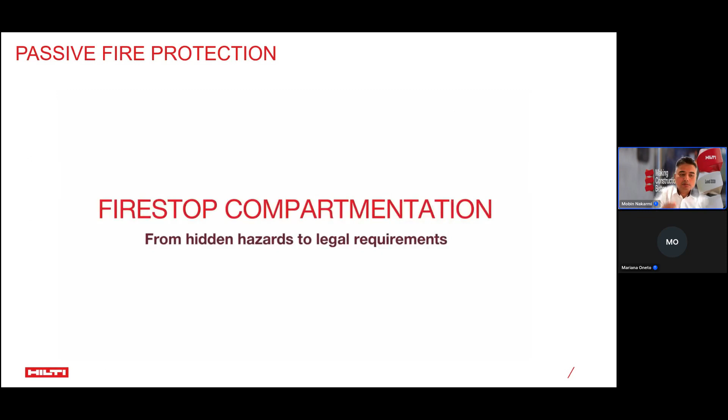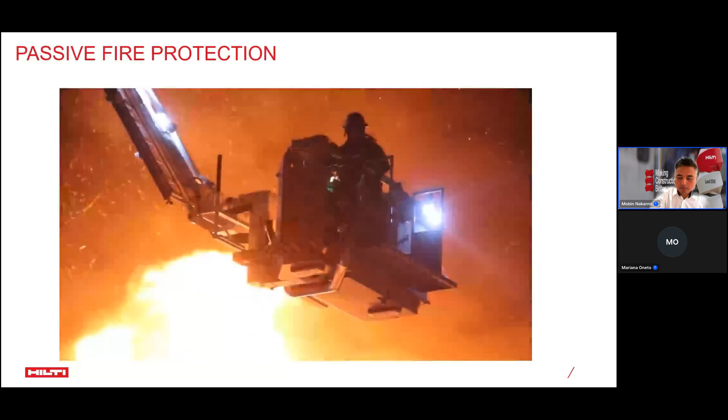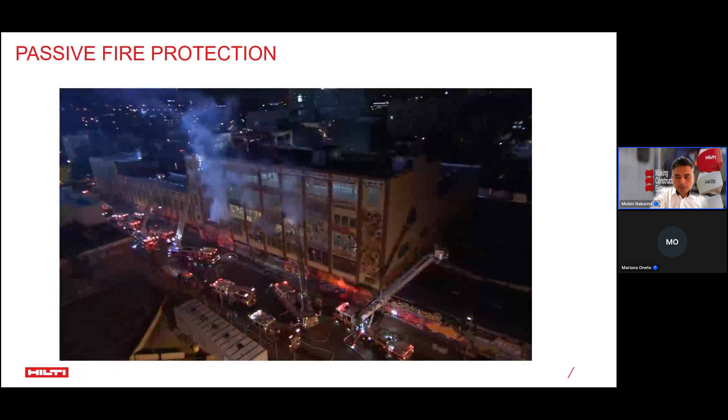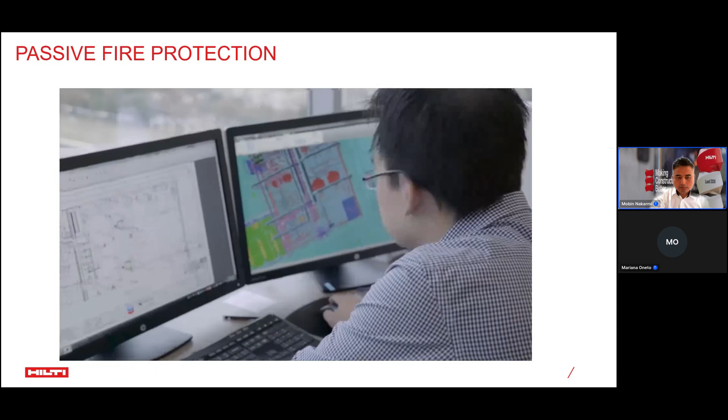Typically, 5 minutes is all you get. Fire, and especially smoke, spread through a building much faster than most people think. Every year, about 3.8 million fires occur worldwide. While damage to assets is in the billions, the yearly death toll amounts to 45,000 persons. Much of this could have been prevented if correctly installed fire protection had been in place. Architects, planners, engineers, and building owners are responsible for effective fire protection. Oftentimes, they do not realize that Firestop is not an option. It's a clear legal requirement, and negligence or improper execution is a violation of the law.

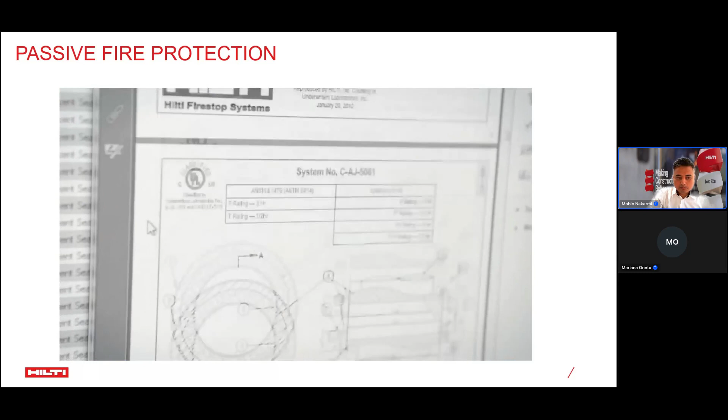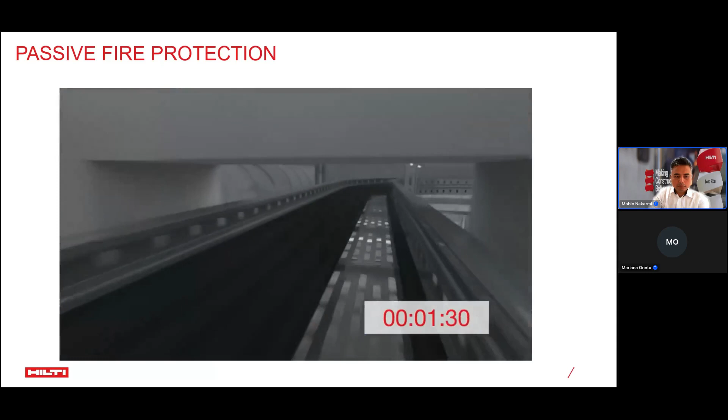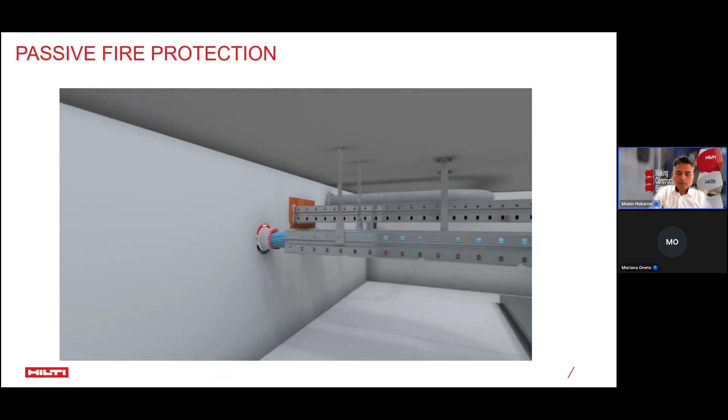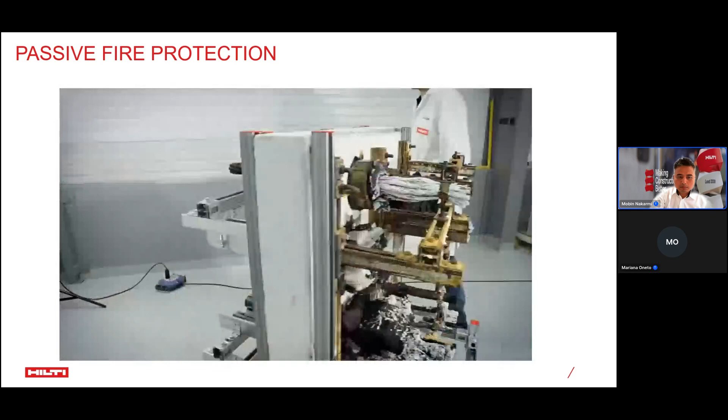Nearly 60% of fire deaths are not in the room of the fire's origin, and 3/4 of all fire deaths are caused by smoke. When there are through penetrations in walls and floors, toxic smoke easily spreads to adjacent rooms. The keys to effective fire protection are both active protection, such as detectors and sprinklers, but also passive protection. Passive means that penetrations in walls and floors have been sealed with approved Firestop products. This principle is called compartmentation. When installed correctly, fire and smoke won't be able to spread from one compartment to another. This allows for safe evacuation of people and protects valuable assets.

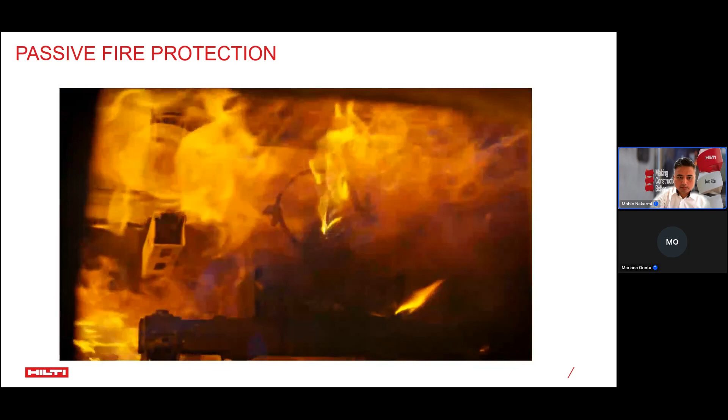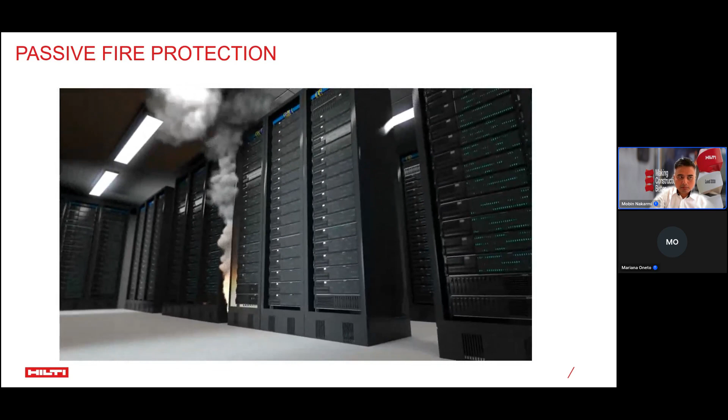The thing about compartmentation and fire protection is it's only as good as the products you use. One always thinks that accidents only happen to other people. That's a false conclusion. It is the responsibility of architects, planners, engineers, and building owners to protect lives and assets by effective and well-designed compartmentation.

Well, that was a very nice video. It also illustrates how fast the smoke and fire travel, if you've noted the time that was shown in the video. It also talked about the concept of compartmentation and showed different kinds of fire protection measures that are in buildings.

So in a building, there will be different kinds of fire protection measures in place. For example, your detection system. Some of the examples are your fire alarms, your smoke detection, your gas detection systems. So if the fire, smoke or harmful gas propagates, the occupants need to be alerted, and that is the way to do that in the building.

The next one is your active fire protection. Examples of that will be sprinklers and your fire extinguishers. The concept here is to suppress the fire or smoke by cutting off the source of the fire itself or oxygen. The next one, which is the topic of our interest for today, is your passive fire protection.

It relies on the concept of compartmentation as discussed in the video, limiting the spread of the fire from the place of origin to other parts of the building. Some of the examples are your fire doors and passive fire protection products applied in penetrations and joints. We'll be talking about why third-party certification for such products is important today. But I should also mention that effective fire protection is a balanced approach between both passive and active measures.

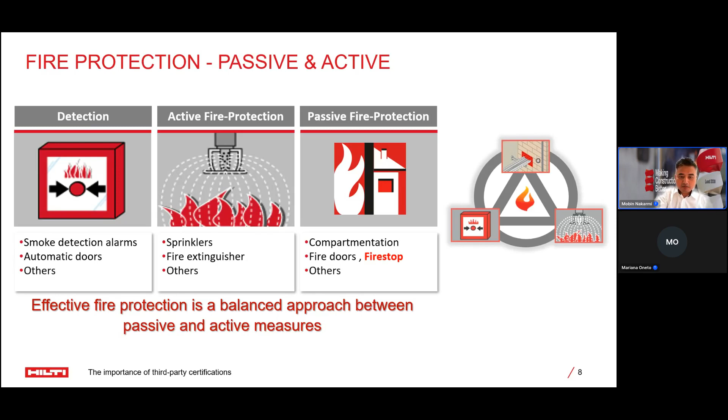Now, going back to fire compartmentation, also known as fire zones, as discussed, it is a globally renowned concept, first of all, and it's well defined in NCC. The concept is to limit the spread of the fire, smoke or harmful gases from the place of origin to other parts of the building, so that occupants can be rescued.

The fire exits and your corridors are safe for a period of time, so the occupants can be rescued. Emergency services can reach out in time and carry out the rescue operation, and it also maintains the structural adequacy of the building, so that the rescue operation can be carried out.

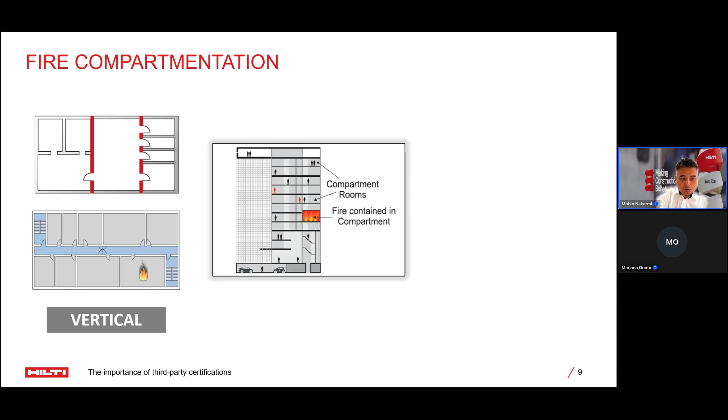Okay, so there are two types of compartmentation. One is called vertical compartmentation, created by fire-rated walls. As you can see in the picture, the fire-rated walls are protecting fire from spreading to the corridors. The other one is your horizontal compartmentation. The concept here is to build fire-rated floors so that the fire and smoke don't jump to a different level.

So in a building, normally both vertical and horizontal compartmentation will be in place to divide the building into different compartmentation zones. And NCC provides a great explanation on how these buildings, depending upon the occupancy, the class and the type of the building, should be divided into different fire zones.

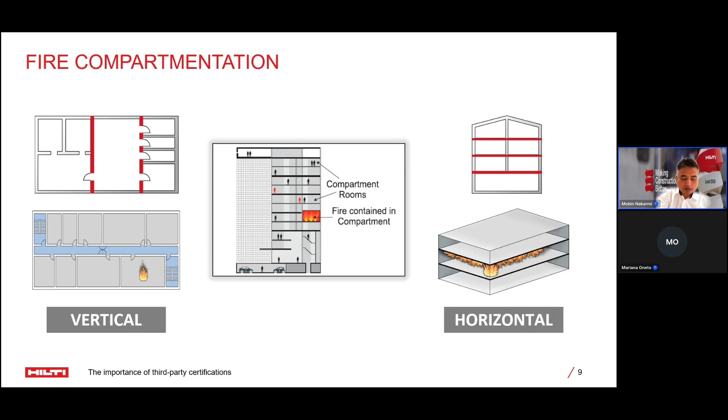Now, we mentioned the concept of compartmentation and the fire-rated building elements, the floors and walls, to create those compartmentations. But we also need to acknowledge that different services need to penetrate through these walls and floors in the building, like your cable trays, power and communication cables, your HVAC pipes, your plumbing pipes. And there will also be joints and joint gaps to allow natural movement of the building.

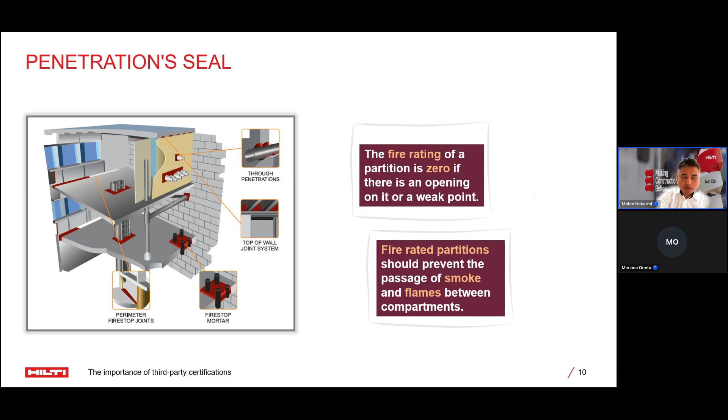But having said that, these gaps and penetrations are the natural pathway for fire and smoke, and that's where it spreads from. What it means is as soon as there is a penetration or a gap, the fire rating of that building element or compartmentation immediately becomes 0. These penetrations and gaps need to be fire treated to retain the minimum FRL rating of that building element. Passive fire stopping can be divided into 3 categories.

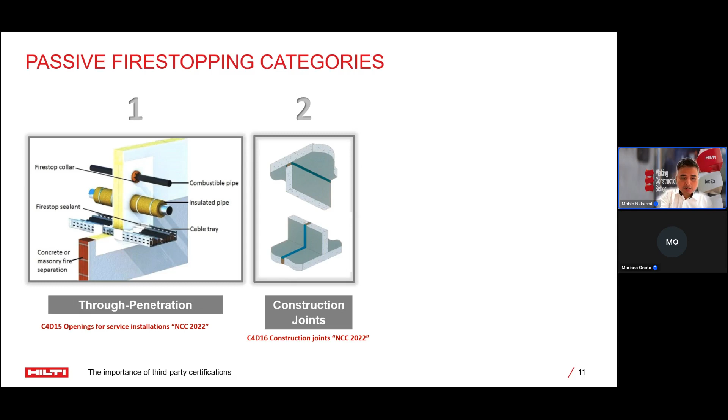The second category is your construction joints. Examples can be your top of wall joints, wall to wall joints, floor to floor joints, your expansion joints. Any kind of static or dynamic joint is included in this category. The deemed-to-satisfy provision for that one is Part C4D16 in NCC 2022. The last one we have got is your perimeter joints.

So it's normally your fire-rated floor touching the non-fire-rated, the joint between the fire-rated floor and non-fire-rated curtain wall or facade system. And you can notice that there is no deemed-to-satisfy provision written over there because there is none. So basically, because there is no deemed-to-satisfy provision, it doesn't mean that we do not have to treat it. All right. So normally the performance requirement of such is met by a performance-based solution.

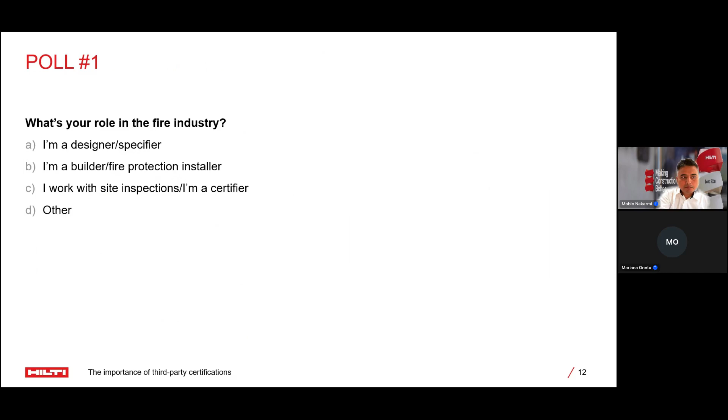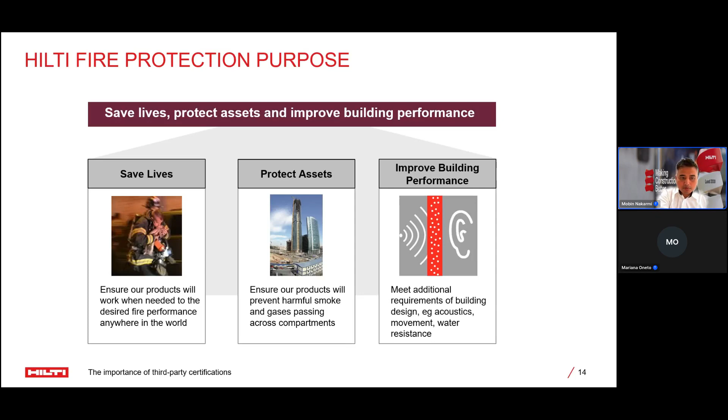Now, this is our Hilti Research and Development Center in Kaufering, Germany. I believe, Mariana can correct me on this one, this is the second largest site for Hilti after our headquarters in Schaan. So in that development center, there are different business areas for electric tools, accessories, and fastening. Also, fire protection is one of them, right? We do have the competence center over there as well, for different business areas like electrical tool approvals, prototyping, analytics, etc. And it is also the Center for Research and Chemistry Technology. And fire testing is one of them. So we conduct fire testing in our R&D center.

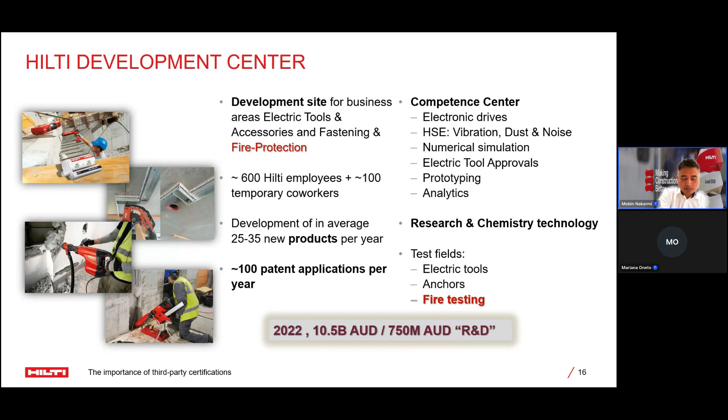One of the interesting facts I want to highlight is that annually, on average 25 to 35 new products are developed in the R&D center, and that's pretty significant. So we invest around 5% of our turnover annually in R&D to develop new processes, new technologies, and new products. So in 2022 alone, 750 million Australian dollars was invested, where the turnover was 10.5 billion. So that is a testament to our strong R&D.

One of those examples in terms of Firestop innovation is preformed devices. Now, foams and sprays and sealants, they are all approved products, and they're well and good as well. But the thing is, you need a little bit of skill to apply those kinds of Firestop. It needs to be applied to a certain depth. A certain annular gap needs to be maintained. The services need to be supported at a certain distance, and it needs to be cured as well. So preformed devices eliminate those kinds of challenges. First of all, they are easy and fast to install and avoid human mistakes, or I should say minimize human mistakes.

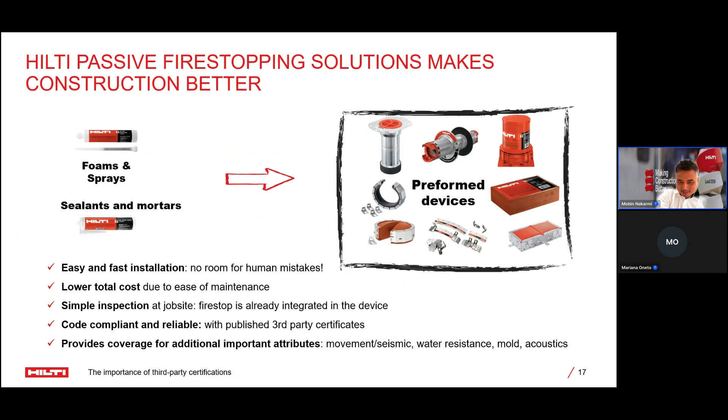The cost of maintenance and even the cost of installation is reduced if you look at the overall cost, because it's very productive and it's easy to install. And it's easy to inspect in comparison to sealants as well. The Firestop is already integrated in the device, and as you can see from the picture itself, it is easy for inspection. And all of our Firestop products, not only the preformed devices, are code compliant and reliable. And they have third-party certificates as well. And they also provide coverage for additional important attributes, as mentioned before, for movement, water resistance, air tightness, mold and mildew, acoustics, etc.

Okay. Now we'll jump into our main topic for today, which is third-party certification. All right. So what is third-party certification, right? Third-party certification means that an independent organization has reviewed the manufacturing process of a product and has independently determined that the final product complies with specific standards for safety, quality, or performance. So therefore, an accreditation body must first provide an accreditation for the third-party certifiers to allow them to certify products for a certain field of application, such as fire safety. And in Australia, JAS-ANZ, which stands for Joint Accreditation System of Australia and New Zealand, is the authorized accreditation body who shall approve both the certification schemes and the certifiers.

The review of the third-party body includes inspections and auditing for both the production process and the product itself. It includes formulation and raw material reviews, fire testing, facility inspections, sampling, etc.

So once the product is certified, it will usually bear the certifier's mark on its packaging, so it is easy for recognition by the end users. And the third-party approval will be published publicly on the third-party organization's website.

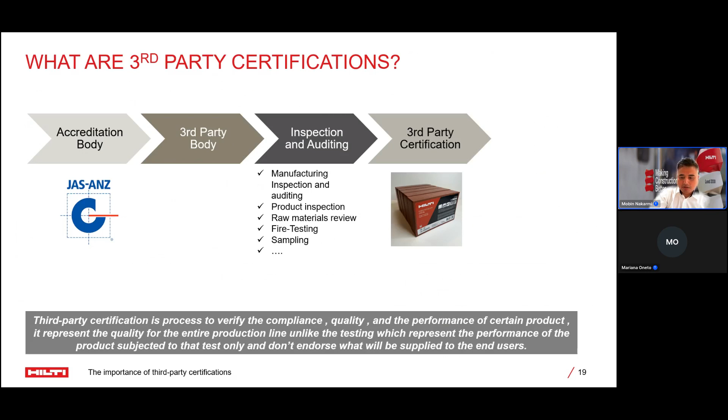Finally, I shall highlight that these processes are continuous, so it's not a one-time process, all right? That means maintaining the third-party certificates also requires maintaining a high quality of mass production of the product for its entire supply life, right? So if we are supplying it in the market, then we need to maintain that quality of the product as well, okay?

Now we understood a little bit what the third-party certification is. We'll look into third-party certifications and why it is important. But before we do that, we have another poll question that must have appeared on your screen. The question says, quality issues in which items below can lead to non-compliance of passive fire protection? Is it A, product, B, installation, C, raw material, D, production, or E, all of above?

Well, thank you for answering. Right, so it should be all of above, isn't it? If there is a quality issue with any of those, product, installation, raw material, production, that can lead to non-compliance of passive fire protection.

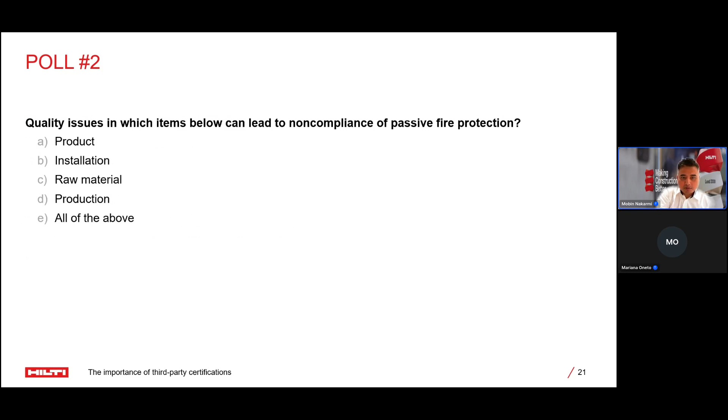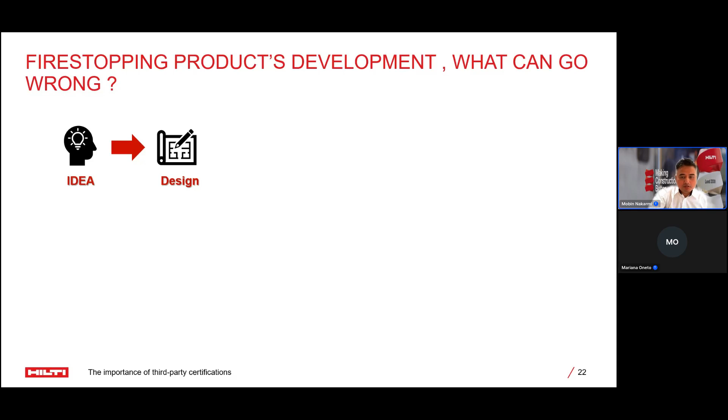Right. Now let's first highlight fire stopping development stages and what are the critical considerations in each of these stages. So usually, product development starts with an idea to fulfill a certain need of the customer or the product. For example, developing a product to seal and protect a service penetration, let's say. The research starts with the concept design and general specification of the product, such as composition of the product and the main product structure, all the way to producing the initial prototypes.

This step includes several internal tests for the physical properties of the product, including adhesion, pressure resistance, movements. If it's an intumescent material, then intumescence reaction properties, and so on and so forth. After this, we provide access for the official testing institute to do the sampling of those prototypes and proceed with the first official fire testing. And this more or less covers the product prototype evaluation.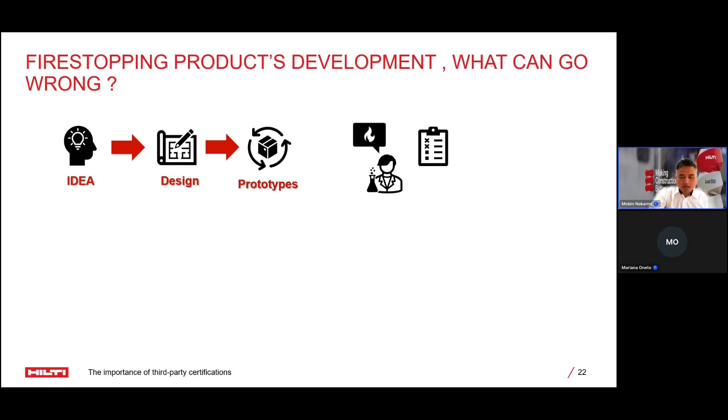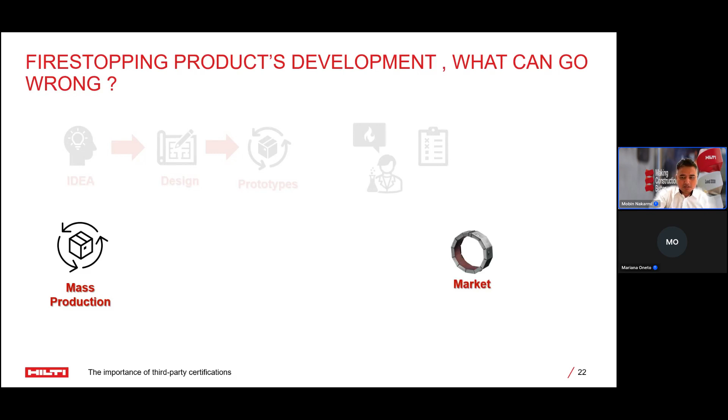And now we are ready for our first samples on a real production line. Products are now ready for mass production and will be supplied to the market, and probably several additional tests may be conducted from the initial production. So now what we have to think is what can go wrong during the phase of mass production. Things like changes in design, raw materials, composition, production process, machineries, skill set of the people. All of these things can change, right?

All of these variations usually happen quite often, and they have a high impact on the quality of the produced product. Meaning, what we previously tested to achieve a certain FRL might not produce the same result if we retest again, right? So this is why the third-party certification plays a vital role to maintain high quality standards and confidence in the product conformity.

The process includes sampling from the production line and evaluation in comparison to the original prototype to ensure both are identical. And if any changes occurred, then re-evaluation or retesting might be required. Also, the third-party certifier sets up a quality assurance plan for the particular product, which includes auditing and inspection of the manufacturer and product, and also market product sampling and evaluation whenever required.

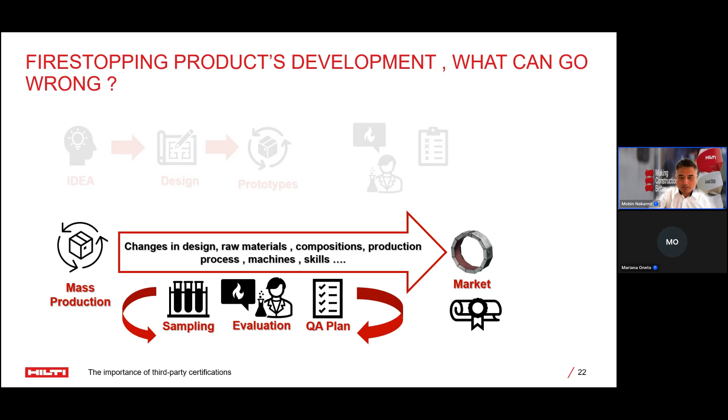Now we would like to discuss further the importance of third-party certification. Here, I would like to refer to some publications from two globally renowned certifiers, and we'll start with UL, which is Underwriters Laboratories, and their Australian product conformity brochure. So I'll be probably reading from the slide.

So they mention that product conformity represents the foundation of community safety objectives. Without confidence in product conformity assessment, it isn't possible to have confidence in design, installation, or approval processes to deliver safe buildings and encourage economic investment and growth.

Also, international standard ISO 17067 defines product certification as follows. So I'll be reading from the slide again. Product certification is an established conformity assessment activity that provides confidence to consumers, regulators, industry, and other interested parties that products conform to the specified requirements, including, for example, product performance, safety, interoperability, and sustainability.

Okay. So if I were to summarize all of this, third-party approvals provide confidence to all stakeholders that what has been supplied can meet the specifications and the FRL of what has been installed and tested previously at the lab.

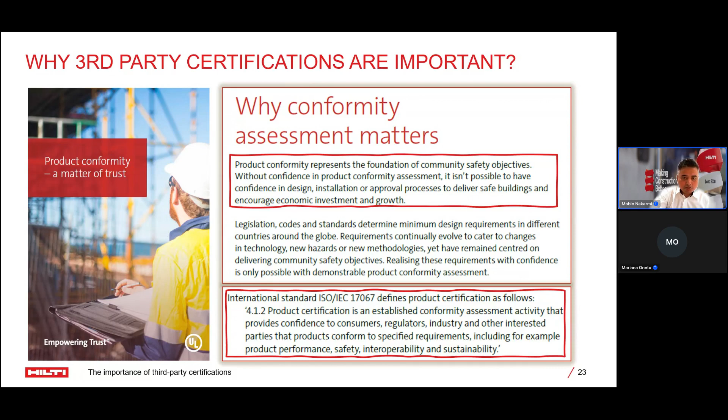Now, further on the importance of third-party certification. Warrington Fire has published a very important technical document highlighting the current issues in the Australian market with regard to the lack of quality assurance in the space of passive fire protection. Warrington Fire is an accredited testing laboratory here in Australia, and Hilti also carries out lots of local testing with Warrington Fire.

So I just want to highlight some snippets from the technical document, and I'll be reading from the slide again. What it mentions is presently passive fire product manufacturers in Australia carry out fire resistance testing on their products in accordance with the relevant Australian standard, then proceed to manufacture and sell the product based on performance achieved in that single test. So there is no need for further testing or checks of that product or the manufacturing process for the lifetime of the product.

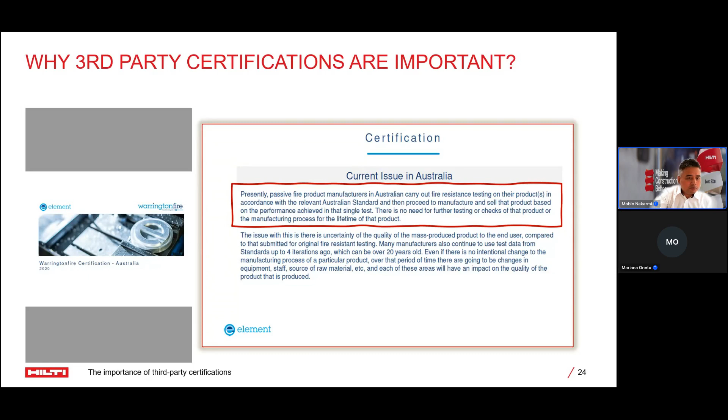Now, the issue with this is there is uncertainty of the quality of the mass-produced product to the end user compared to that submitted for original fire resistance testing. Many manufacturers also continue to use test data from standards up to 4 iterations ago, which can be over 20 years old.

Even if there are no intentional changes to the manufacturing process of a particular product, over that period of time, there are going to be changes in equipment, staff, sources of material, etc. And each of these areas will have an impact on the quality of the product that is produced.

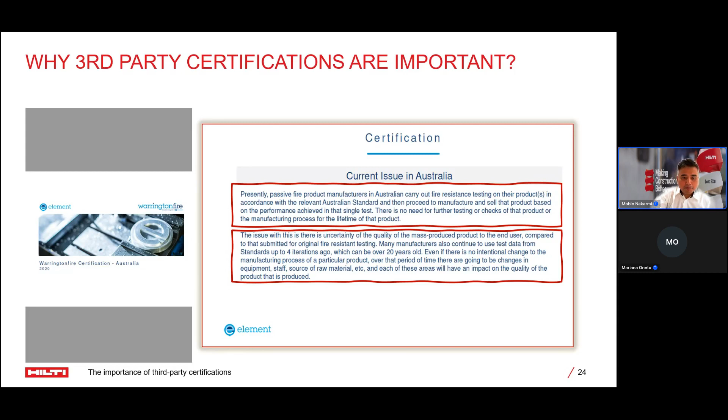Right. So from this technical document and this statement from Warrington Fire, and what we've discussed previously in terms of the process of third-party certification, we can understand how third-party certification can tackle these current issues in Australia in terms of passive fire protection certifications and approvals.

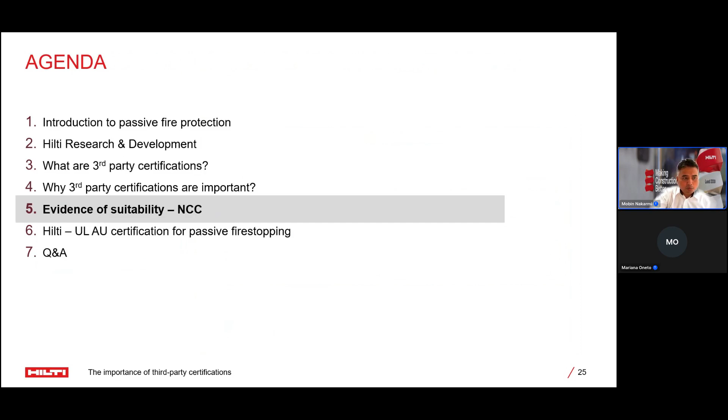Now that we have established the importance of third-party certifications, we'll look into the different evidences of suitability from the NCC. Currently, there are 6 evidences of suitability in the NCC. Some of them are relevant to passive fire stopping that suppliers mainly utilize: your test report or regulatory information report, which we call RIR, as the main approval document submitted to end users as evidence of compliance.

Okay. There's also a certificate issued by a certification body. This is actually the third-party certificate we are discussing today. Historically, there were no approved schemes or certifiers by JAS-ANZ, which is required by the code. But currently in Australia, there are 2 accredited certifiers, and some manufacturers have already started to go down this path.

Now, what I should mention is, even though the code didn't put these accepted evidences in any hierarchy, from our previous discussion it is important to highlight that third-party certification has a more conservative approach and requirement. As mentioned before, it does include required testing evidences plus the full quality assurance requirement.

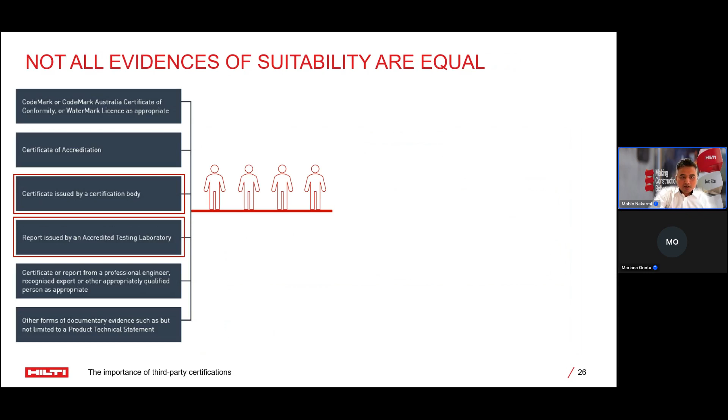Now, here it is important for building practitioners and designers to look into the risk assessment when they review any approval document. What will happen if simply the product didn't work as expected? This can lead to failure of the entire building's fire safety strategy.

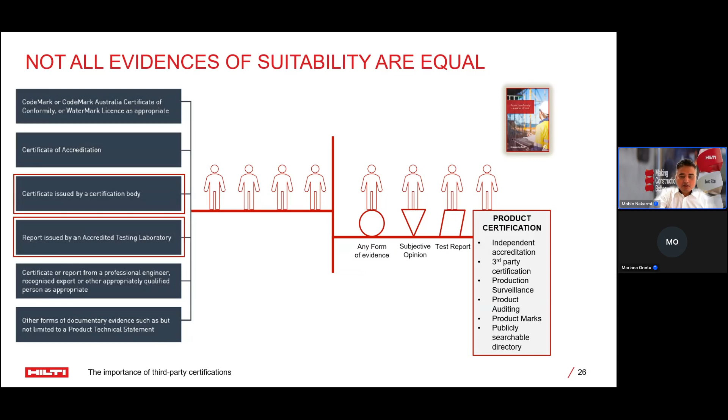So only a third-party certified product can guarantee the performance of the installed product, if installed correctly, of course, right? And can meet the fire resistance level of the originally tested product, simply because third-party certification can confirm that the product that has been tested and supplied are identical. Okay.

Now further, I want to highlight some of the current challenges with third-party certification and the market reforms, to see what's happening in this area. I'll just read out from the slide again, so let's go one back.

First of all, this third-party approval for Firestop is optional. So that is one of the challenges. And there is no mandatory auditing for production and quality of supplied products, and there's no sampling required.

Lab tests are what the manufacturer provides them. So actually, we provide the sample to the laboratory to be tested. And quality of the supplied product can't be guaranteed to ensure continuity of meeting the design of the originally tested product, which we already discussed before.

And there is unfair competition because there's no hierarchy. There's unfair competition between certified product versus non-certified product.

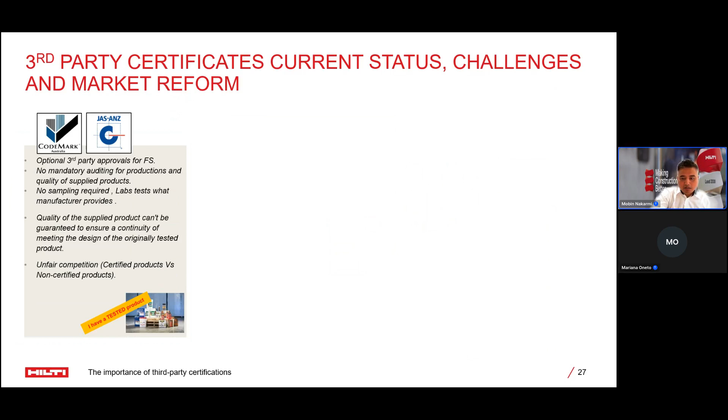It's not doom and gloom entirely though. We do have some market reforms. There are some measures at policy level as well.

One of them is in 2019, the Building Confidence report from the Minister of Building was released with 24 recommendations, where recommendation 21 mentions establishment of a compulsory product certification system for high-risk building products.

But despite it still being an optional approval path, the Australian Building Codes Board, ABCB, released a consultation draft in 2021 to mandate surveillance, labeling, and traceability for essential products.

So we can see that there is a clear acknowledgement about the gaps in the quality assurance space, and some good initiatives from all relevant stakeholders to enhance quality and traceability of the products supplied to the end users. Sorry about that.

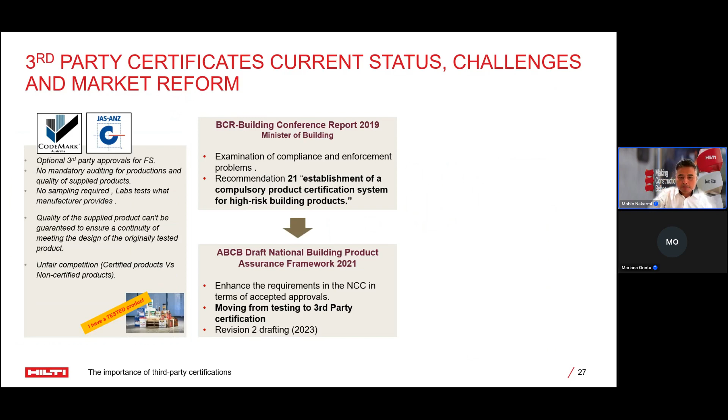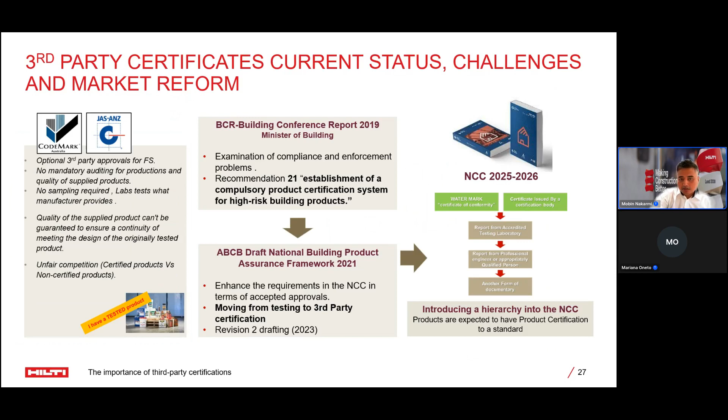So in the 2025 update of the NCC, what we are hoping or expecting to see is a hierarchy in evidence of suitability, which will place certificates issued by third parties as the top accepted form of document to meet the performance requirements. This is something our codes and approval manager, Hani, has been working on, and we are more likely to see this in the NCC 25-26 update.

Now, I think once we have established what third-party certification is, talked about its importance, and spoken about the evidence of suitability, it's time for a third poll.

So the question must have popped up on your screen: which documents below are listed in the NCC as evidence of suitability? Is it a test report, RIR or test certificate, third-party certifications, or technical data sheet? You have 30 seconds to answer this question.

All right, thank you for answering the poll, third poll for today. So basically, all of these documents listed are listed in the NCC as evidence of suitability.

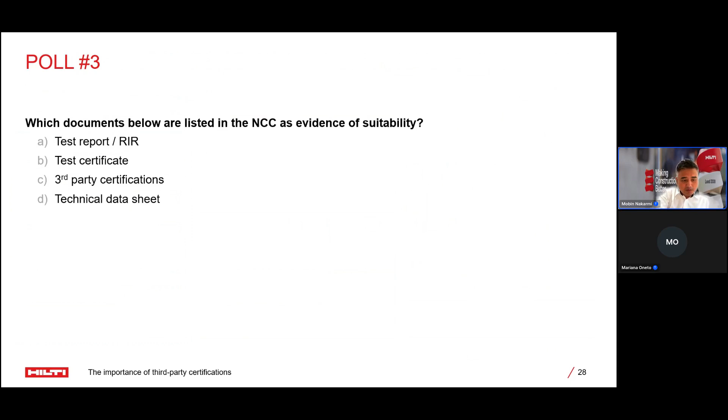So now we quickly move to probably the last section of today. We'll look into the UL webpage and locate the UL certificates for the Firestop products, and also run through the UL certification as well. For that, I'll quickly exit my screen and jump onto Google Chrome.

All right, I believe all of you can see the screen now. So I already have the login account for the UL website, and I believe Mariana will be sharing some of the links to these websites in your chat. If you don't have an account, you can create one for free on the webpage.

I hope that I remember my password. I've tried it before, so I'll try to log in now. It was not working yesterday, but this morning it was working. Let me just see - I already faced a hiccup, so I'll try one more time. Okay, it's already logged in.

I can already see - so you can search by the product name. If you have a product model number, anything, you can search by that. I normally put it as UL AU, so I'll search by that and see what comes up. It gives me a list of documents, but I want to only see for Hilti, so I'll type Hilti in the company name, and it should give me the list of UL certificates.

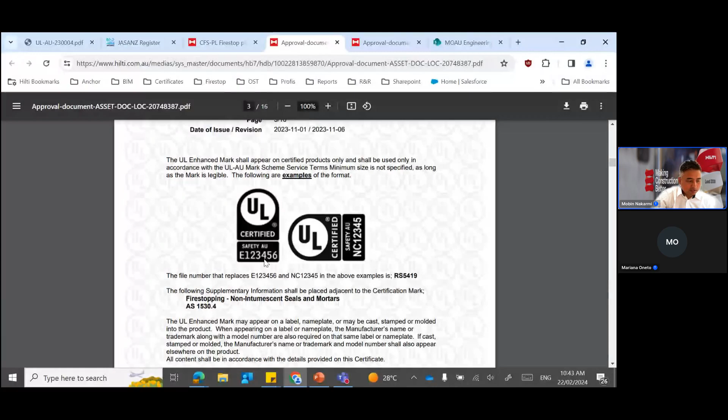In the next page, it mentions that every certified product, and only certified products, will have this UL mark on them with a unique number. As you go along, you will see more information in terms of that Firestop product.

Probably I'll highlight a few of them. I think the first thing I really like about this UL certificate compared to the approval document was how nicely and cleanly it was laid out. It's pretty easy to find the information in that UL certificate.

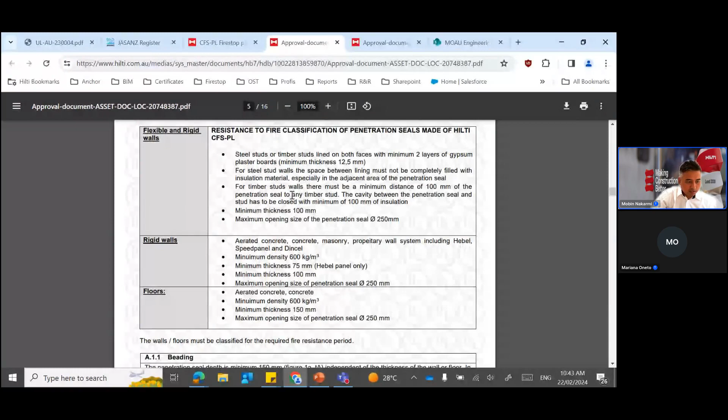So here it's showing the accepted form of flexible and rigid walls and how it should be constructed, and if there is beading required - so if the minimum thickness of the wall is not met, then probably we need to apply the beading, and what that beading requirement is.

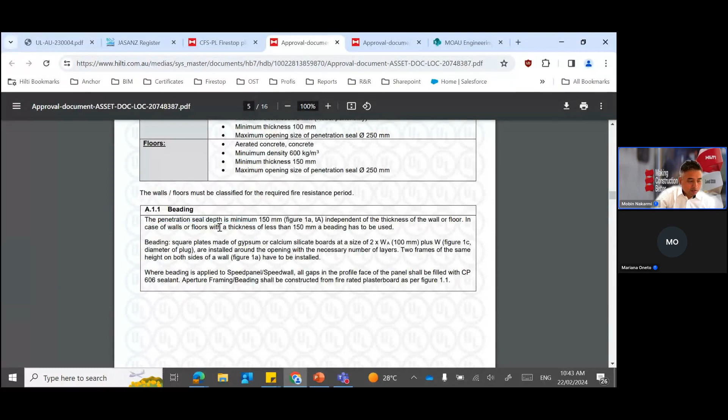I'll just pick examples. As you can already see, the figures themselves are really well illustrated. But I'll just pick some other example as well.

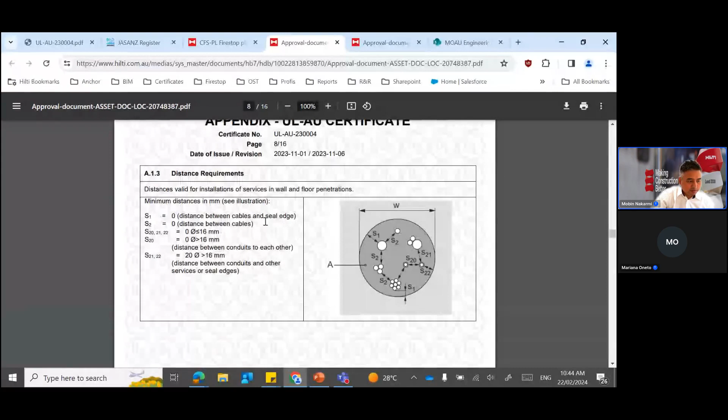For example, it shows you the distancing requirement between the services, how far the services should be from the edge of the penetrations, and between the services, how much distance needs to be maintained.

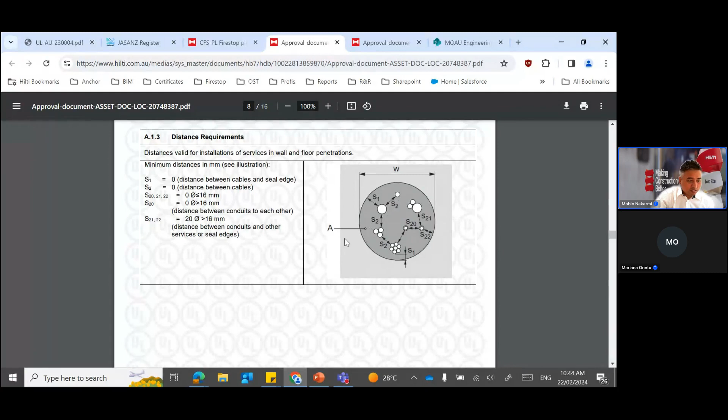Probably I'll just pick this example where it's showing the rigid wall and also double layer plasterboard and different services penetrating through. You can already see that each of these products has been itemized and tagged.

For example, A1 is your Hilti Firestop intumescent sealant. Your A2 is your Hilti Firestop putty bandage.

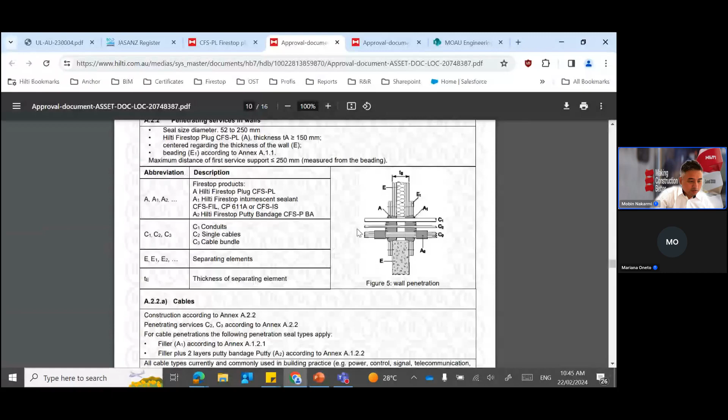So if you go back to that picture, you can see that if you have a standard D1 set cable bundle passing through, you need to apply the plug from both sides. Where the cable touches the plug, we need to apply the CP611A as a filler, and on both sides you need to have a bandage wrapped around for your integrity and to achieve the FRL rating.

Now, if we quickly go down to the last page of the certificate, it will refer to all the test reports that it is based on. So you can find it on the last page in the appendix section.

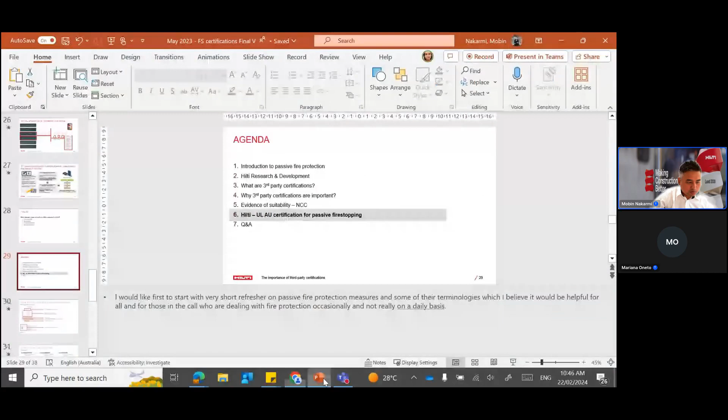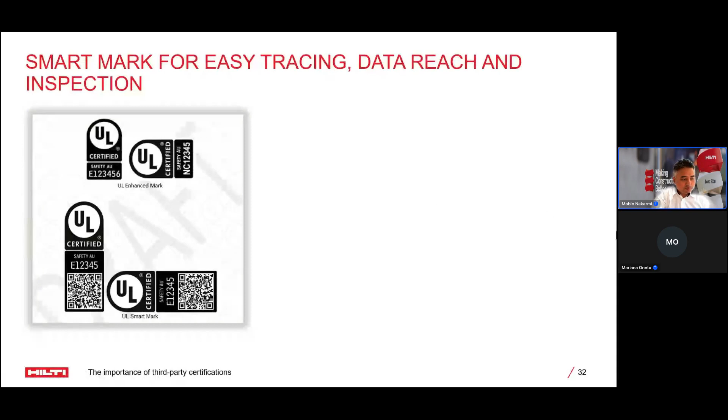I hope you're able to see that. So as mentioned before, every product packaging should have a UL mark. One interesting thing about that UL mark is there is a QR code as well. If you scan the QR code, it will take you to the UL page, and from there you can download the certificate. For all of our products, except for sealants and some bandages, we have updated the UL certificate on our website. For the sealants, it is under process and will be updated soon.

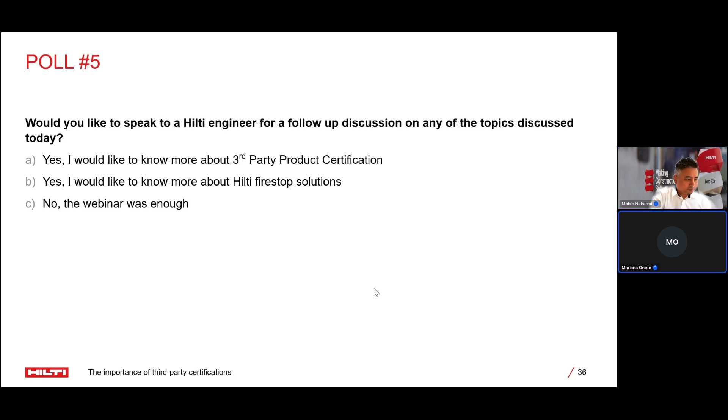Thank you for answering the poll question. Do you have any question, Mariana? No, I think your presentation was very good, so no questions, I hope. Sorry about a little bit of... I had a little bit of cold, so I tried my best to not affect the presentation.